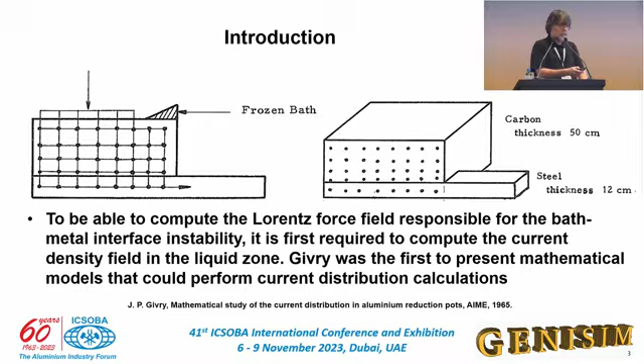So it started in the 60s. Givry was the first to try to do this kind of calculation, and he was using a network of resistances like we see here, horizontal and vertical. Now MHD-Valdis was only doing vertical up to this code version. So we'll see what impact it has on the result, and after that I will introduce more changes.

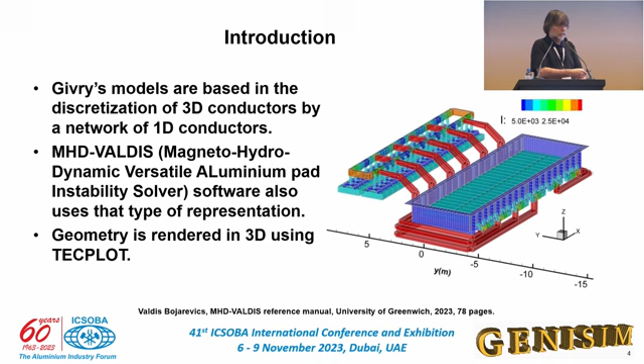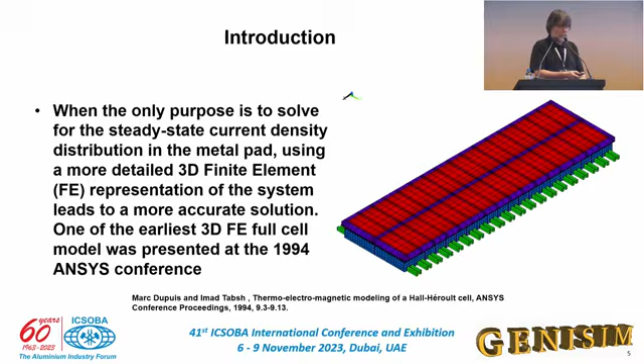And then as comparison, you can use ANSYS, finite element, and here I will compare with this type of model that I published first in 1994. You build a parametric model where you define the geometry of the cathode, the collector bar, and the anode, and then you get this kind of model. It is, of course, more accurate because it's a true geometry, and you can have properties that are temperature dependent. So it's a good comparison.

So what has changed between the code versions? The old code was assuming only a linear conductor going vertically down. So the cathode was essentially a series of tubes of carbon, with no possibility for current to travel horizontally. And it was not asking for the cathode's size because we were using the ledge toe as a boundary condition. So any line conductor blocked by the ledge was not carrying any current.

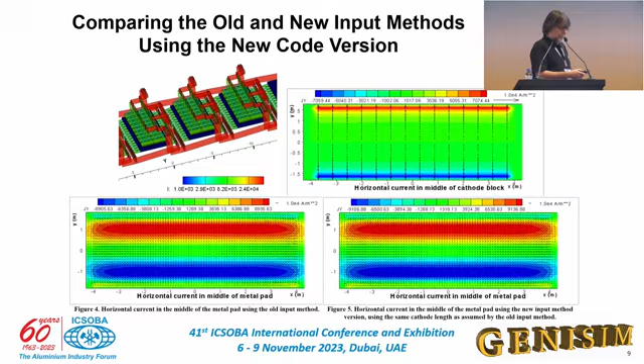But if you use the old code with the old input, of course, you're getting this solution that is very different. About half of the horizontal current, and this is more like the right solution. But this old input was limited, as I was saying. You have to apply only one uniform contact resistance, and now we are trying to be more flexible.

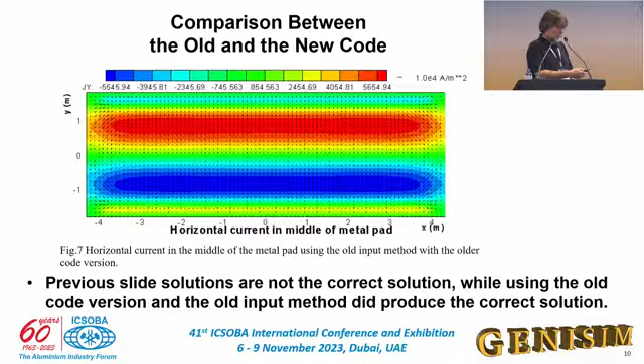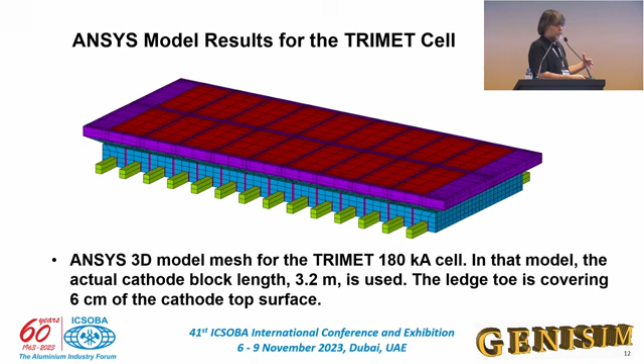So yes, now I will present some examples and we'll compare with ANSYS. So this is the ANSYS representation of the TRIMET cell. And this is the ANSYS solution for this geometry. We have a prediction of CVD, we have a prediction of the maximum horizontal current. And as you can see, it's quite close to what the old code was giving.

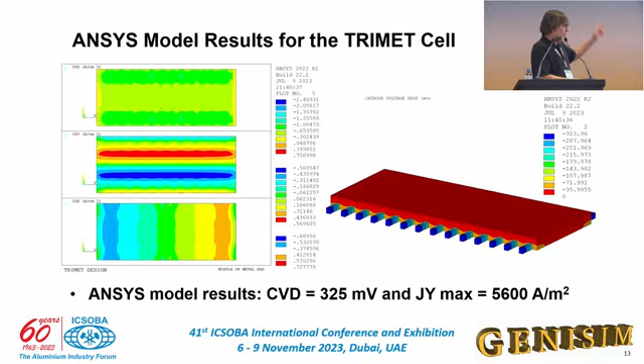Then, because I faced this discrepancy, I wanted to investigate more, and the next improvement will be explained in the TMS paper. But it's not a limitation of the code. It was a limitation in the property that we used.

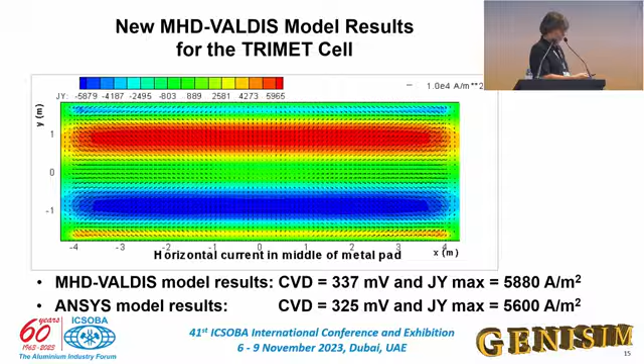Okay, so now, MHD Valdis was not really designed to give only the current density in the metal pad, but it's convenient because it's very quick to obtain, and it is parametric, so it is very quick to get the input in the model to get a solution. So it would be nice to be able to rely on this, and that's why. By doing the comparison, you can feel comfortable to use this as a first, let's say, quick solution if you want to experiment with options.

Here I'm going to give some examples of what you could try to do. So the first is to try incomplete bar rodding. So here I use the new flexibility to remove any contact in the last 3 units. That's representing removing the last 10 centimeters of cast iron when you rod. It is something that has been done for the last 50 years, like AP18 was already doing this. And this could not be represented in MHD Valdis up to now.

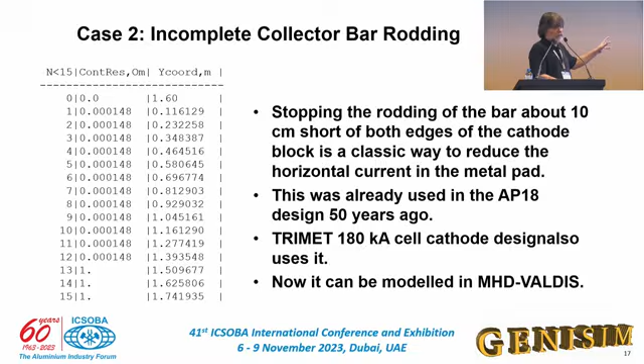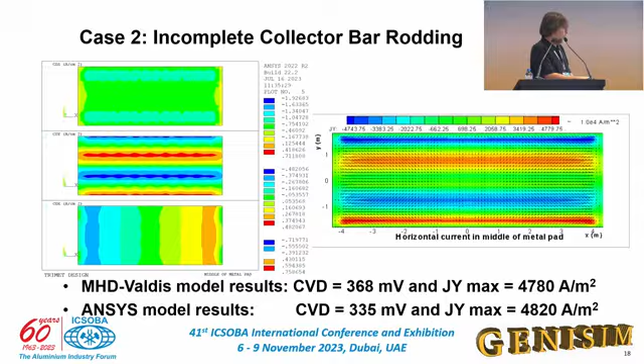Okay, here I'm trying something different yet again. It is selective rodding, which I presented in a paper in 2000. So you stop casting in some sections. So you cast here, and in between you put some insulating material, some cement, and then you can get a very uniform current density on your block surface. That's one way to achieve this, or getting rid of horizontal current.

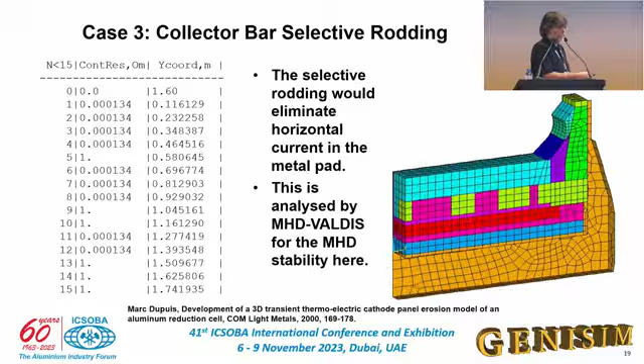So here I'm showing the MHD Valdis solution. It's almost completely removing the horizontal current in the y direction. The color coding is the y direction of the horizontal current. But as you can see in the arrows, I have some X component because of the geometry of the TRIMET cell. And that will become important for what I will present soon.

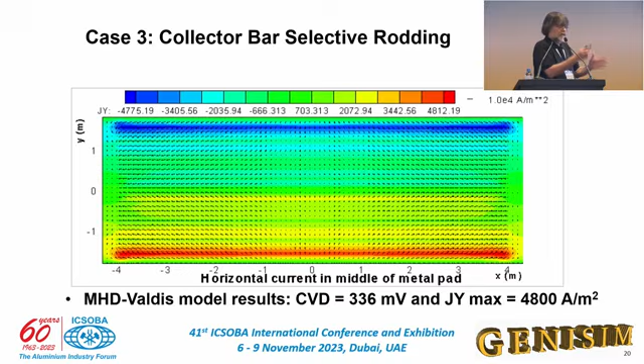So remember that I got rid of the horizontal current in the y direction by selective rodding, but not in the X direction, because it's of course only affecting the y. The X direction is affected by the geometry of the anode panel and the geometry of the ledge. And in the TRIMET cell, it is not really matching well. Okay, so now that we have obtained the horizontal current, we can go to the full transient analysis. That is the purpose of MHD Valdis.

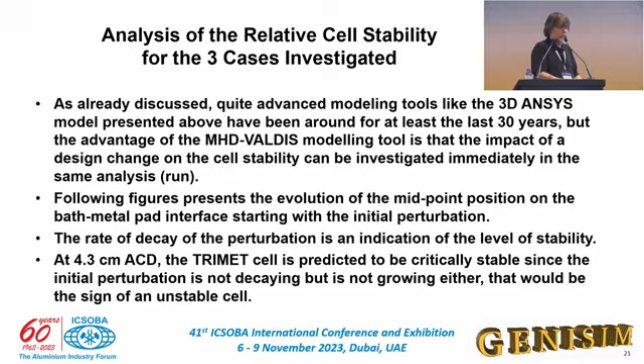So here I'm comparing two solutions. The first one is the standard, let's say, when you fully rod up to the edge of the block, and at 4.3 centimeter ACD, we are getting a kind of a critical stability. The perturbation is about stable.

And if you do the partial rodding, at the end you don't rod the last 10 centimeters, you can see you're getting a damping, so that means that now the cell is stable, and so this is what you get as a solution of an MHD stability study.

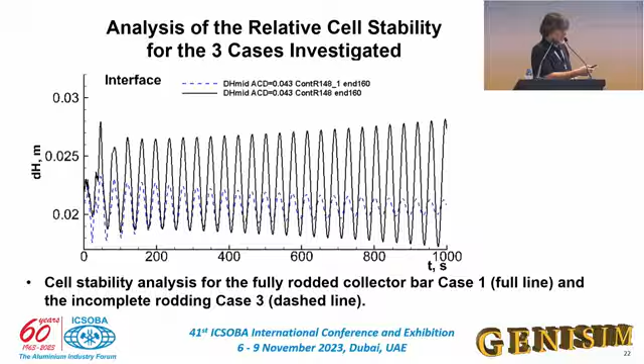So to give you an idea, because my next paper coming next is a way to get this solution faster. This is about 24 hours CPU time involved in those two curves, 12 hours each, because it's about the time it needs to produce this solution.

And now I'm presenting one more here. Here I'm comparing selective rodding and incomplete rodding. And to my surprise, initially, I'm getting about the same stability. So it means that the further reduction of the y direction horizontal current did not improve the stability.

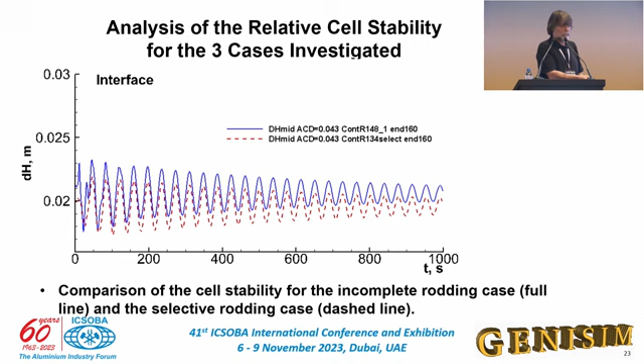And our explanation was because we have all this x direction horizontal current that we cannot improve. And then I will confirm that at the TMS, presenting future results.

Okay, and here you can also use MHD-Valdis to get an answer to the question how this partial rodding, not rodding the last 10 centimeters, represents as ACD. And so we have decreased the ACD until we get again critical stability. And the result is 2 millimeters of ACD that you gain by this 10 centimeter partial rodding.

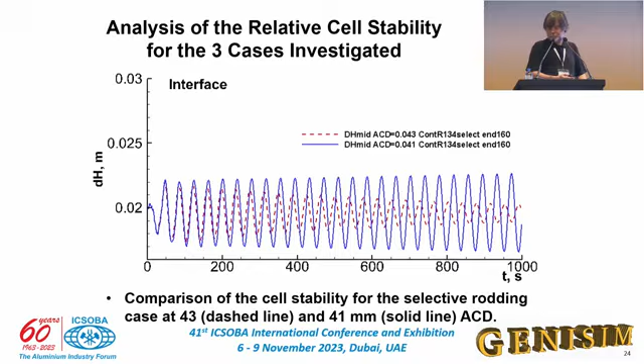So I'm ahead of my time. It's not bad. This thing is good.

So conclusion, I presented a new version of MHD-Valdis with more flexibility. With this new input file, you can now do things like partial rodding or selective rodding, or you could even have, if you can achieve that, contact resistance that evolves along the length, all kinds of things you can try to do, then you can investigate in MHD-Valdis. And then we have seen some examples of what you could do with this new flexibility.